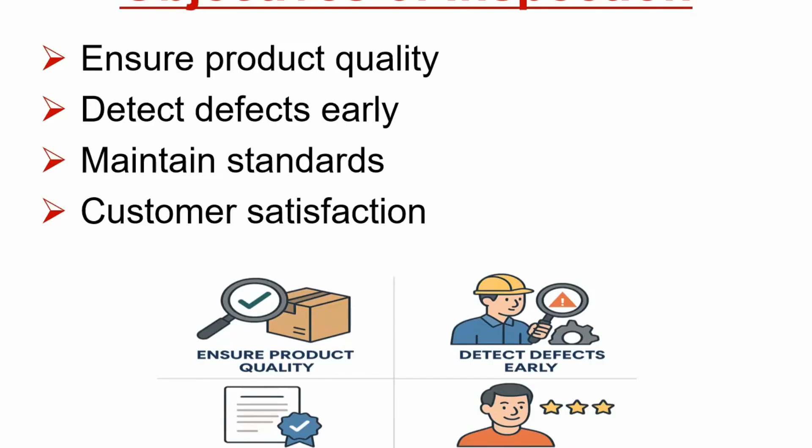In order to have the defect, if there is any defect, it is to be detected early. We carry out inspections, and that's the main purpose of inspections. And maintain standards, to maintain the quality, maintain our products as desired by the customers or specified in our specifications. Final is the customer satisfaction. A customer will be satisfied only when the quality is ordered. So inspection is being carried out mainly for quality purposes - by maintaining quality, we remove defects, maintain standards, and provide customer satisfaction.

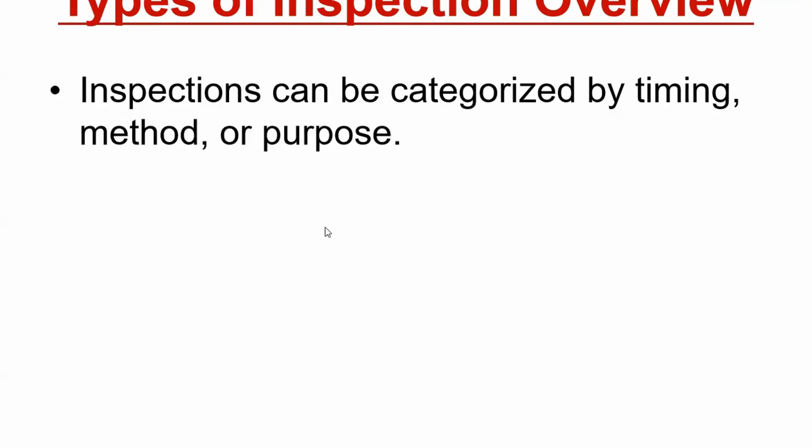As we said earlier, the way this inspection works is the types of inspection. Inspection can be categorized, organized by timing, method, or purpose. So the inspection we are discussing today is for product inspections. The product inspections can be categorized by the timing at which we are doing it - whether it's at the incoming material stage or initial stage inspection, or it is between the method, and according to the purpose. What is the purpose of this inspection is also used to categorize inspections.

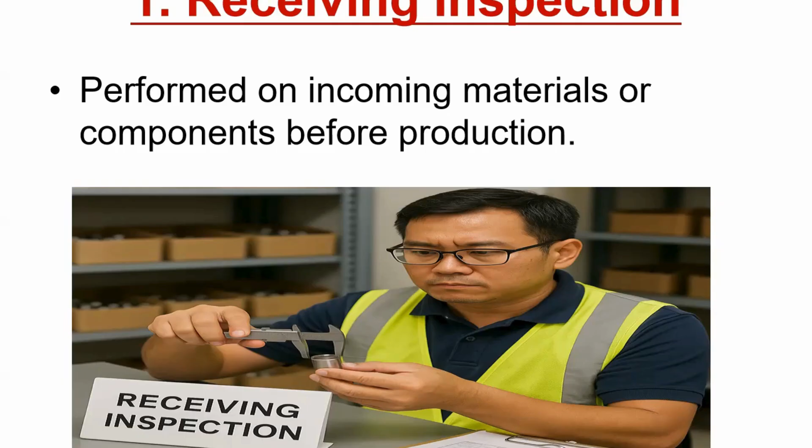What is the other type of inspection which we have in manufactured products? That is the in-process inspection. In-process inspections may include a number of inspections, because it all depends upon what processes I am doing to convert the raw material to a final product that is useful to the customer and as per the customer's requirement. There may be a number of jobs: machining, welding, fitting, as per the mechanical process. In the chemical field, there may be a chemical process. In the battery industries also, there is a system in which we categorize different materials and put them together. And in other fields also, this can be a different kind of production.

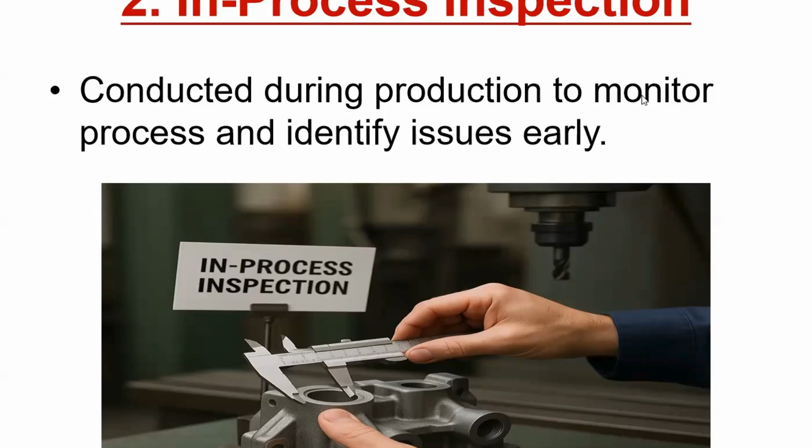After the completion of the inspection, our final product is ready, and we go for final product inspection. This is performed after production is completed to ensure the finished products meet specification. This is a very critical one. This is our product which is going out in the market to be sold, so that everyone should purchase it, and it should have the quality customers require.

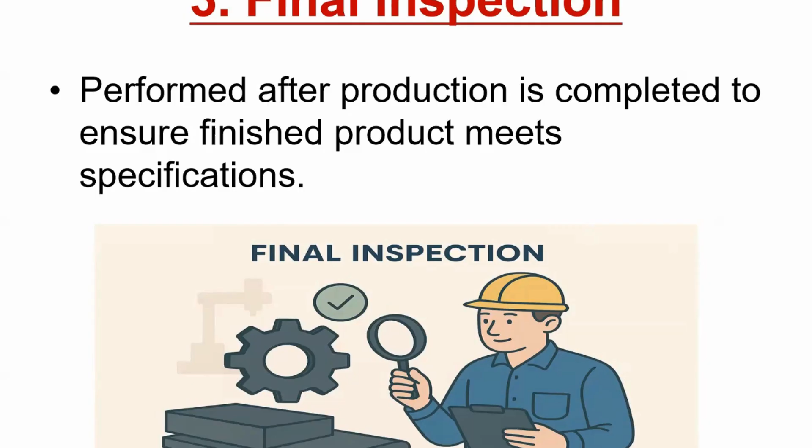So it has to perform all these qualities, and these inspections are called final inspection. In the final inspection, there are various kinds of inspections.

First article inspection, first sample inspection. We take the product's first sample and inspect it, checking all its properties, whatever specifications or standards are required, to be tested and then finalized. So the product coming up should meet the makers' standards, as per the requirement or not.

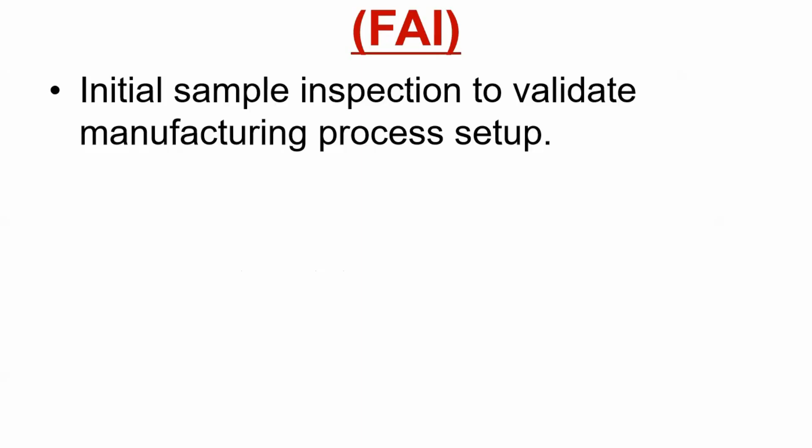We go for this, and once the first sample is ready, then we go for different other product inspections.

Now it is random inspection. My product is ready, but only one product will not be ready. There may be many products ready, might be thousands, might be hundreds, might be in tens. So what do we do? We do a random inspection.

Random inspection means out of a lot of all the materials, say 1,000 pieces, I will select some pieces, about 10 or 100 pieces, and test them to see whether they are all as per the requirement or not, as per a particular requirement.

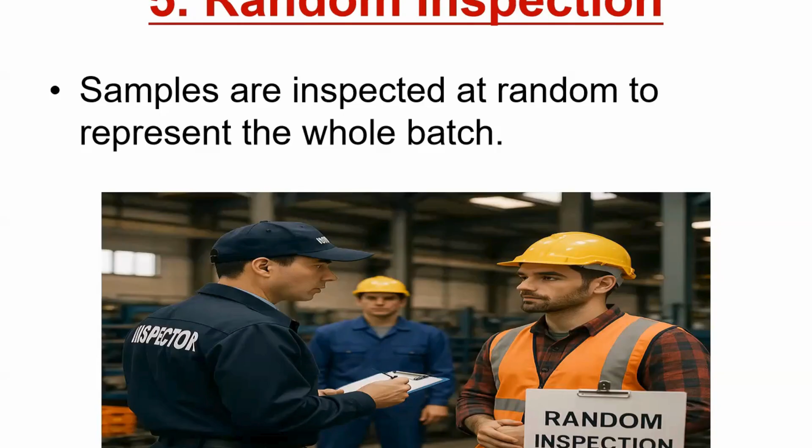Next, that is 100% inspection. If anything goes wrong with the random inspection, we always go for 100% inspection, and it is always advisable to go for 100%, so that none of the products fail to meet the standards or customer requirements.

Because if out of 100 one goes wrong, even then one customer will be unsatisfied, and that will affect customer satisfaction, his reactions and feedback will come back, and that may hurt the product. So that is the 100% inspection.

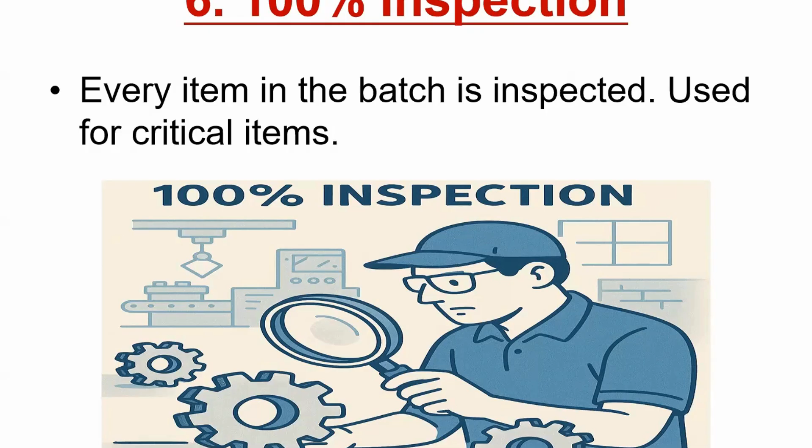We go for this. Here we go for all kinds of inspections, whether it is visual, dimensional, or chemical. Sometimes we can go for chemical tests also and other products also.

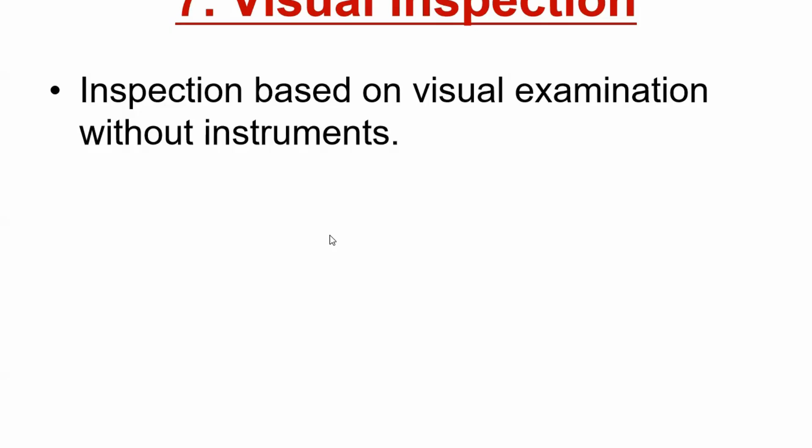Now, visual inspection means how does it look like? If my product has all the required qualities and quantities as per the standards specified by the customer, but it doesn't look good, nobody will purchase it. So this is the first impression of the product, which comes through the visual. The finished product should be very satisfying and attractive in its finish, and that's what we do in visual inspection - how does it look like?

As I said earlier, there is dimensional inspection. We measure all the dimensions to check whether they are perfectly as required, and for this we use instruments which are already calibrated, and their standards are to be maintained.

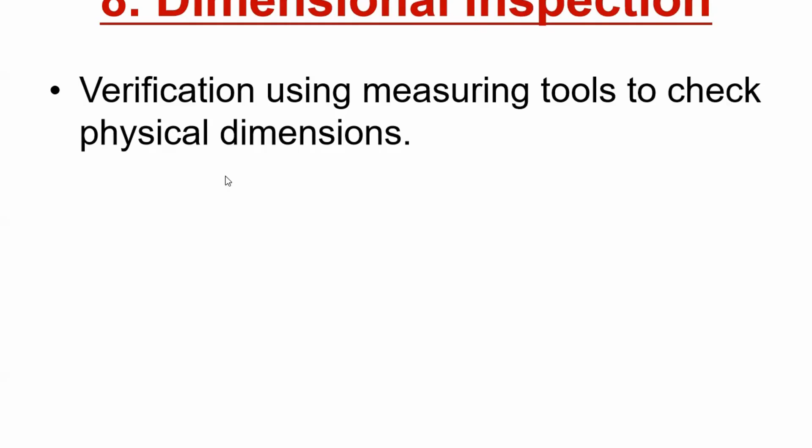Dimensional inspection has been covered. Next is functional inspection. This is very important.

If I have developed a product for a particular function, for example even a hanger - a very simple example. The hanger's purpose is to hang the article. If the article has a weight, the hanger should maintain its shape with that weight or not - that's important. Or if I have a spray gun, it is spraying something. Now whether it will spray with the same quantity and same flow or not, that is most important. So we go for functional testing as per the functionals devised and required by the customers.

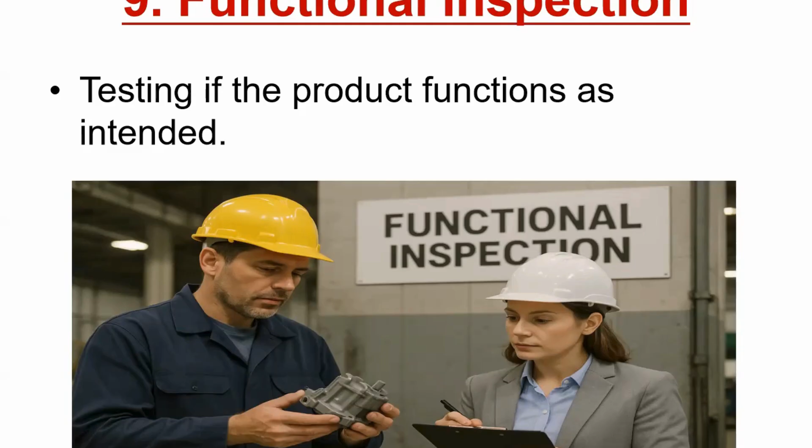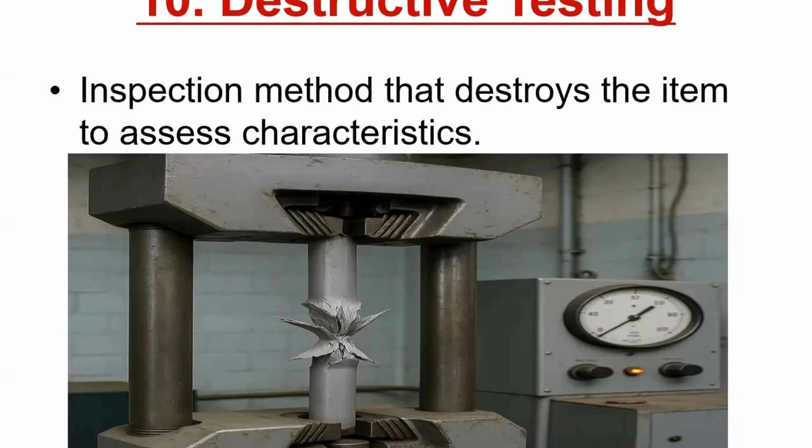Destructive testing. As I said, sometimes we may go for destructive testing also to have a complete understanding. In this, our product is being destructed - once this test is done, we will not be able to use this product for further use. But of course for testing we can use it in different parts and other things. Destructive practices are very costly because it costs the product.

Next is non-destructive testing. Why should I destruct my sample? Why should I destruct my product if I can take care of this without destructing it? These techniques are called NDT, non-destructive testing. Here the testing is carried out on the sample, testing is carried out on the product, and the product is not destroyed - it can be used as a product itself.

Now what are the types of NDTs? In mechanical fields, mostly it's UT, ultrasonic testing. In this we send ultrasound signals to the product and take the reading back, similar to how a radar system works. Similarly with RT - radiographic testing. Here instead of ultrasound, we use radioactive rays. But radioactive rays are definitely harmful, and it's better if it can be avoided by doing UT instead.

But in certain products and certain types of tests, we require RT only.

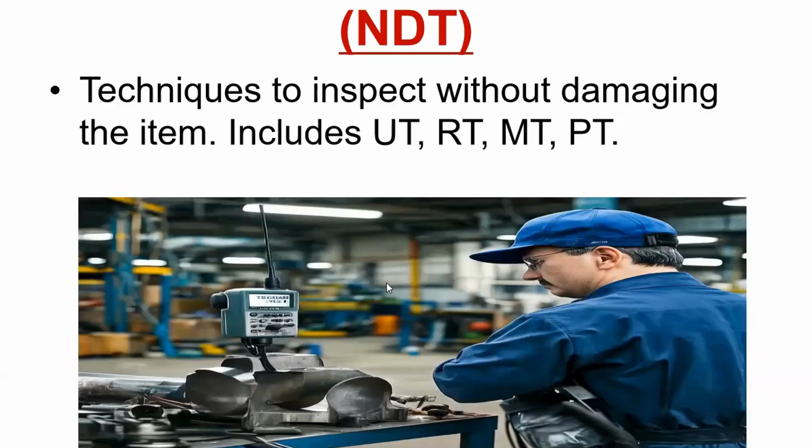Next is PT, LPT - liquid penetrant testing. We see what defects are on the surface. This is used for surface defects.

Inspection can be manual, when done by a human, or it can be automatic inspection done by machines. In machines we fit equipment and then the machines do the work which we want humans to do. Nowadays robotics is also there. We can use robots also for all these testings, and of course artificial intelligence is also required.

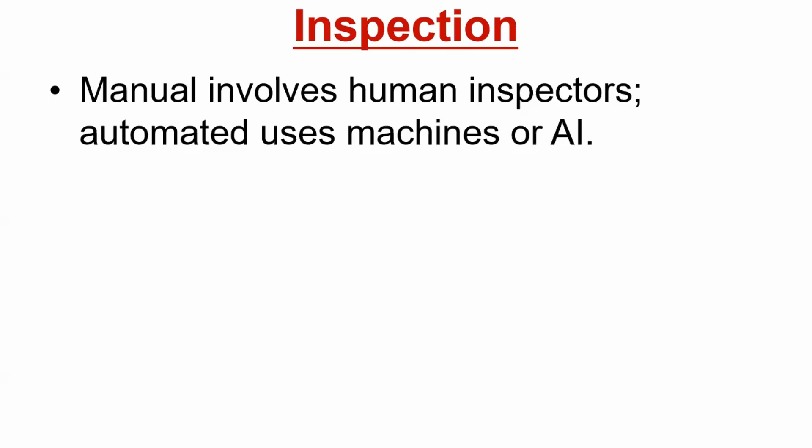Now when we see the product, when we are going to sell it, what we have discussed is all about manufacturer's own inspections. At the same time, a part of this inspection, like final product inspections, can be checked and tested by a third party, or the customer can do it itself. It can be done by the client, by the customer, and then by the third party - meaning anyone assigned to carry out the inspections.

Sometimes some materials, some items require 3.2 inspection, where in-process testing is also carried out by external or third party inspections. That's the end.

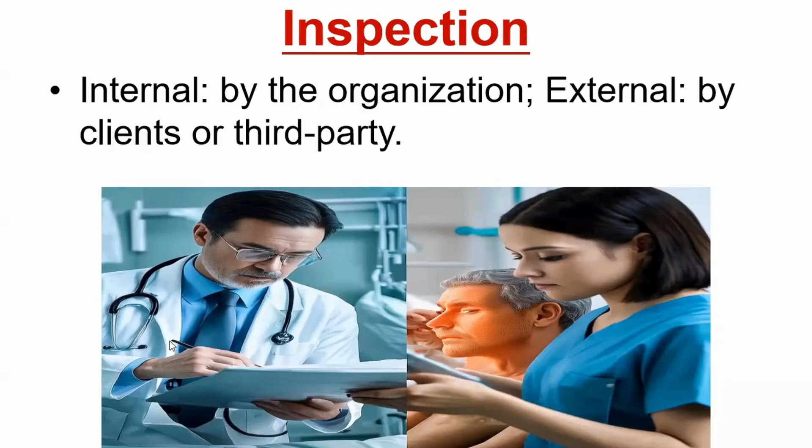Now, regulatory inspection. These inspections are very important because there are certain types of fields which are required to be used in a particular area. When things are required to be used in a particular area, they require a certain practical process. And for that testing, not everybody can test.

There are certain agencies assigned by the government who test whether items qualify for use in that area. For example, things may go under fire, or under water, or they may be explosive in nature, like gas cylinders. Whether the container can hold that much pressure and avoid explosions is tested by the director of explosives.

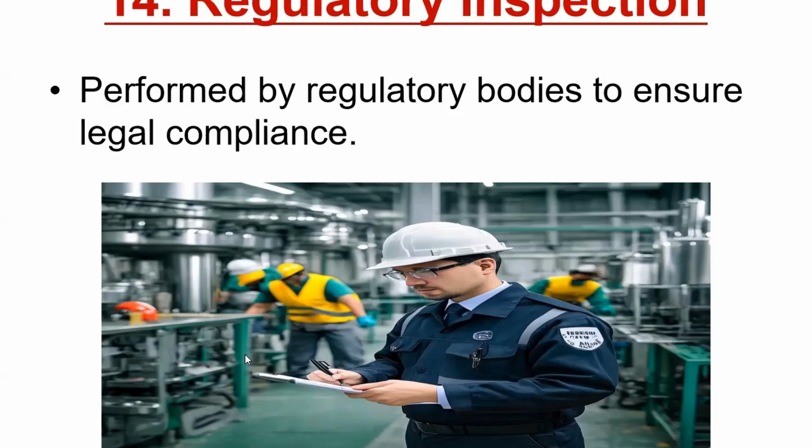So there are certain bodies who give this certification, and this is a requirement of the customer, depending on the customer's requirement. With this, next please.

Next slide, please. Next slide, please.

Hello. Hello. So the PPT has been done. Yeah, the PPT has been done, so only the conclusion part is left, and the thanks slide is left.